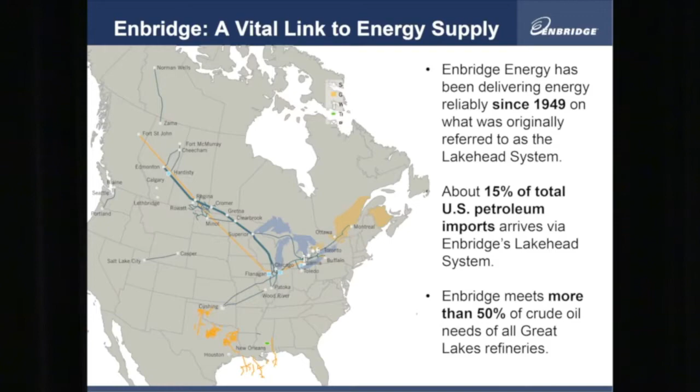So I wanted to start by giving a brief overview of Enbridge and our overall system. We operate the world's longest pipeline system in Canada and the U.S. The system you see across the map on the page is about 50,000 miles of pipelines collectively between our gathering systems, main lines, and others across North America. Movements through our system account for about 15% of all total U.S. petroleum imports through the Enbridge system. We deliver about 2.5 million barrels per day of crude oil and liquids petroleum through our system, and as a point of reference, that accounts for more than 50% of the crude provided to the Great Lakes refineries in Chicago, Detroit, and Superior, Wisconsin.

We also are a player in the gas pipeline gathering and processing system. We own about 1,000 miles of offshore pipe in the U.S. Gulf of Mexico, as well as onshore gathering pipe. We gather and move about half, or 50%, of the offshore gas production in the Gulf. On the Canadian side, in eastern Canada, we own and operate the largest natural gas distribution system in the Toronto and Ontario areas.

We also, as an energy company, have an emerging green energy platform. We currently have ownership interest in about 1,800 megawatts of wind, solar, geothermal, and heat waste recovery through our system, for a total capital investment of about $3.5 billion in green energy technologies. On the growth side, we've got a number of growth projects underway. I won't get into detail on those today, but they total about $35 billion in committed growth and expansion projects.

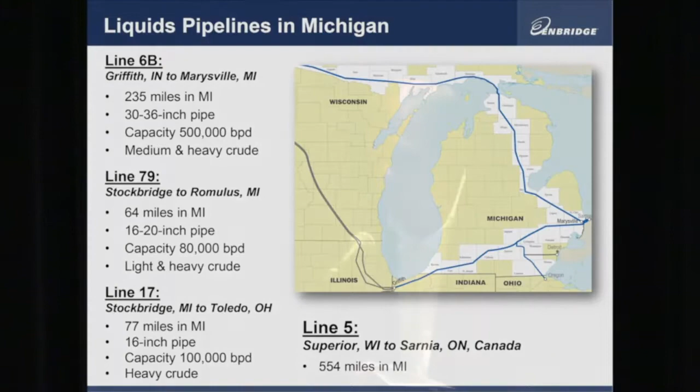Looking at liquids pipelines in Michigan, I know tonight we're really going to focus on the northern pipelines. In total, we have 4 pipelines in Michigan totaling about 930 miles of pipe, and that represents the pipeline we're here to talk about tonight across the northern system, Line 5. We also have pipe that traverses down in our 6B pipe in southern Michigan, along with 2 pipes that feed markets in Detroit and Toledo, that being Line 17 and Line 79.

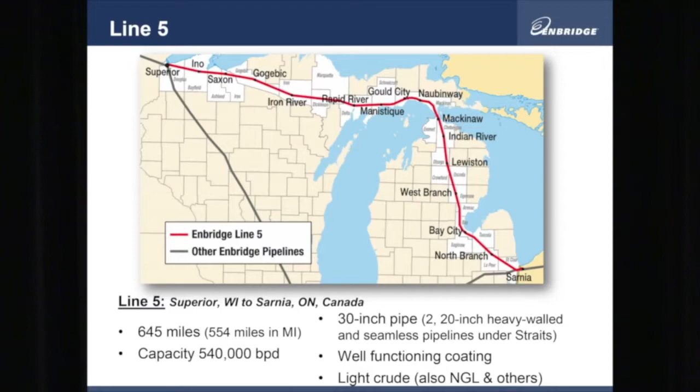Looking more specifically at the northern pipeline in Michigan, Line 5 is a 645-mile pipeline. It's a 30-inch pipeline, with the exception of the Straits of Mackinac crossing, which consists of 2 heavy wall seamless pipes under the straits, and then back into 30-inch pipe for the remainder. Its capacity is about 540,000 barrels per day, and it's a light crude system - movements through Line 5 would consist of natural gas liquids batched with various light products, including light crude oil and condensate.

As I mentioned at the start, safety is really the cornerstone of our business. We recognize we have to operate a safe and reliable system. It's critically important to us, part of every day, certainly of my life and my role. There isn't a day that goes by that we don't talk about safety, and in some cases the better part of the day is spent on safety and operational reliability, it's that important. Since 2012, over the past couple of years, we've spent $4.4 billion in the area of reliability and safety. I'm going to talk about some of those programs as I go through here.

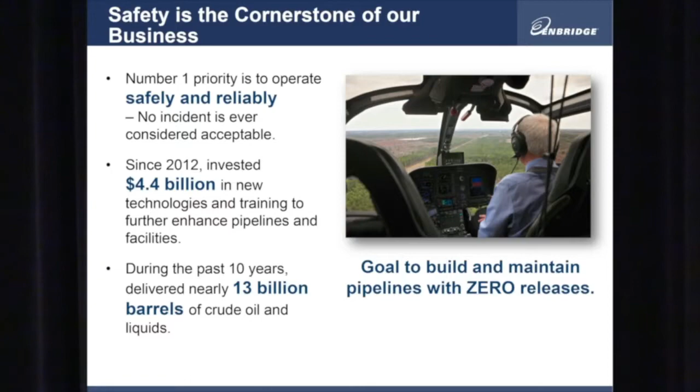We focus on going beyond just being okay. We really want to be industry leaders. We have involvement in a lot of different things, and when you talk about some of the programs I show tonight, we get involved with the development of the technology and really push to advance it. During the last 10 years, we've delivered approximately 13 billion barrels of crude oil and liquids. I can go into the safety record, which overall on the barrels is very good. I want to say that our goal and our target is zero. Zero pipeline incidents, and I think that's something that we want to achieve, and that's our focus.

When you look at safely transporting crude oil, there were a number of different modes of transportation shown in the previous presentation - rail, truck, others. When you look at it from a pipeline perspective, there really are a number of components that contribute to safe operation. That being engineering design and the materials you start out with, whether it be the steel, the coating, the cathodic protection, those types of things.

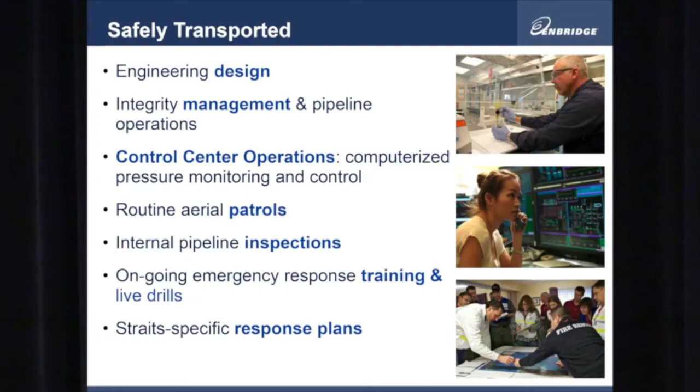The ongoing integrity management, once the pipe is in the ground and the facilities are in the ground - how do you take care of it? How do you monitor it? Control center operations, ensuring that we're monitoring on a 24/7 basis, pressures in the system, looking for anomalies and upsets.

We do routine aerial patrols over every foot of our pipelines on a bi-weekly basis. So we have a lot of aircraft in the air. Some of you may see them doing their thing, but we would be looking at right of way, looking for any problems that can be seen from the air, any third-party activities going on, whether it be excavations and things, to really keep an eye on that.

And then finally, really looking at emergency response in the event that there is a problem. How do we respond? Are we trained and qualified? It's an important part of what we do, making sure that we have the training, we have the plan in place, and we are conducting live drills.

When you look at our operations in Michigan, we do have response plans, tactical response plans, which lay out where the boom would go along shorelines, where it would go, where your access points would be - all those things mapped out in a tactical response plan for not only the Straits, but for other significant water crossings.

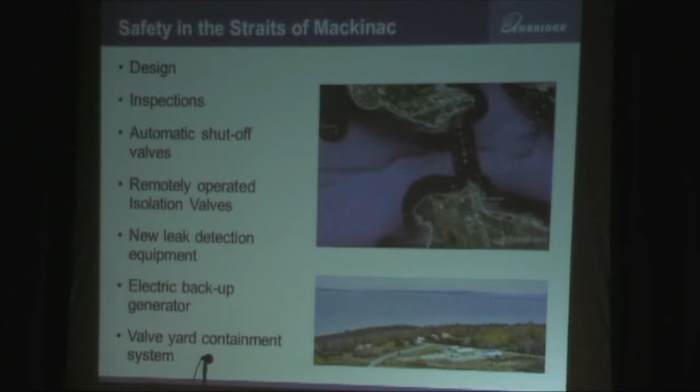When you look specifically at the Straits of Mackinac crossing, it really starts with the design of the system. Back when the pipeline was constructed in 1953, it was an extensive engineering project. It was one that took a lot of attention and focus. It was done by probably the leading energy or engineering company in North America at the time, Bechtel Corporation. It included peer reviews by the University of Michigan Department of Naval Studies and another university to really make sure that we were getting the design right. As we sit here today and look at the current state of the pipe, we look back to that design as being vitally important to that system.

Safety in the Straits involves inspections, and I'm going to talk more about that later, so I won't go into a lot of details, but both inside the pipe, understanding what's going on, and also outside the pipe, understanding what's going on with the environment.

It involves automatic shutoff valves across the Straits. In the event that there's a pressure drop, our control center operators would be monitoring that. In the event that pressure drops, those valves are shutting immediately, with this sequencing of pipeline shutdown as an important safety feature. We have remotely operated valves, which our control center operators can operate.

New leak detection equipment and technology, really wanting to push the envelope on how small a leak we can detect in the operating pipeline system, what new technologies exist out there. There are a number of them, and we've got a department whose day job is to focus on making sure we've got the latest technology.

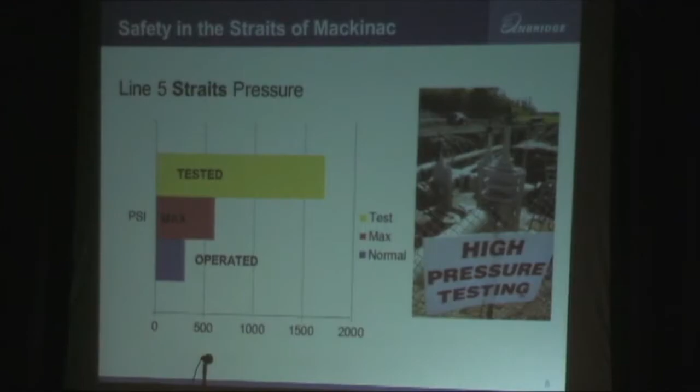Here is just a depiction of our pressure across the Straits. The pipe, as I said, is about an inch thick, 20-inch diameter, seamless pipe, tested to 1,700 pounds. It was tested again as part of the installation, post-installation. So we defined the upper limit of the testing at 1,700 psi. We've established a maximum operating pressure of 600 psi, so we said we're not going to go over 600. The pressures you see in that pipe today across the Straits are generally under 200 psi. So we're operating some very substantial pipe in a very, very low pressure system. That operating range would range anywhere from 0 to 300, but on a daily basis, if you were watching those pressures, generally sub 200.

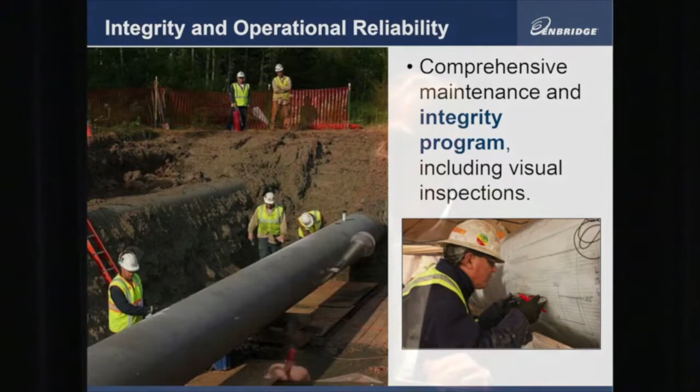I mentioned early on that we spent $4.4 billion over the past couple of years, and one of the big areas is just our integrity and operational reliability programs, really taking a look at all of our pipelines in our system, doing extensive, literally hundreds of inspection runs through the pipes, identifying any anomalies detected, going out and doing literally thousands of digs like the one you see in the picture here, where we dig it up, we map anything you can see on the outside of the pipe. We do UT analysis to see any metal loss on the inside of the pipe, and do a comprehensive job of evaluating that. If needed, we would apply a sleeve that would be welded to repair the pipe. And we do that across our entire pipeline system.

There's been a lot of talk about our incident in Marshall, Michigan, which was certainly one of the low days in our organization. It's been near 4 years now, and we've done a lot since then. We've invested a lot, and I wanted to specify exactly some of the things we've been working on since Marshall.

Leak detection - we have a department today that's dedicated, their day job is to make sure the leak detection we have is effective, which can include a mass balance where we are measuring what's going in, what's coming out, and the difference, to things like smart ball technology, which puts a small ball through the line, a couple of them, and detects acoustical sounds, to other emerging technologies.

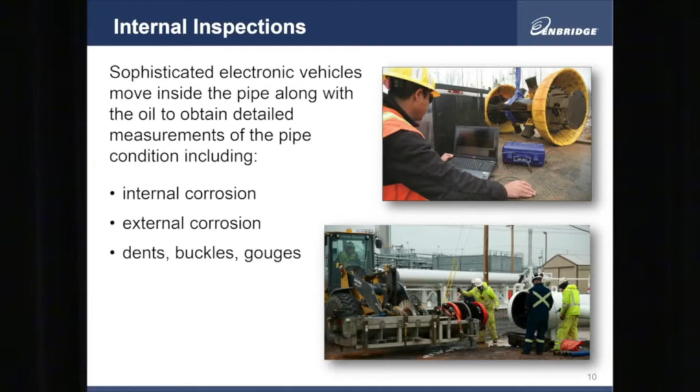Internal inspections. We run internal inspections using multiple technologies. On the metal loss side, the MFL tools, making sure we're looking for any corrosion inside or out. We're running the new and latest crack detection tools through the pipeline systems, which use basically medical quality ultrasound on the pipe walls to make sure we're identifying any cracks. We also have tools to identify any dents, buckles, or gouges along the pipelines, so we can go in after the fact and identify those. That's an emerging area which we've invested millions in to push the envelope in terms of what can be detected from inside the pipe.

Specific to the Straits of Mackinac, we're also conducting external inspections of the pipe on a biennial basis, so every 2 years we're doing a full inspection of the crossings. We've developed and are using remote operated vehicles, and we're also working closely with Michigan Tech in developing an autonomous underwater vehicle which is able to traverse the pipelines and get good quality data on spans, anchors, and supports along the pipeline.

And then finally, we do aerial patrols of the pipeline. I mentioned already at least 26 times per year, and more in areas if warranted. Any of our field representatives, if there's cause for needing to shut down and bring out aerial patrol to fly a line segment, are authorized to do that. And then finally, we're also able to get out with foot patrols.